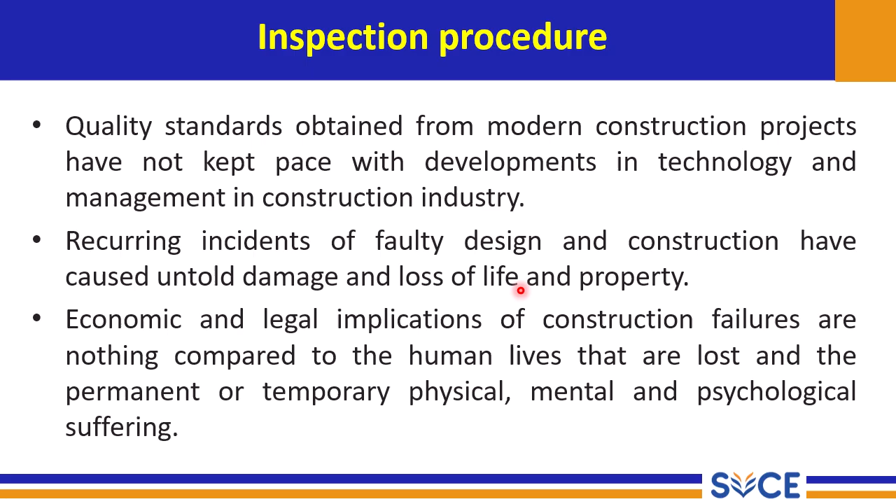Here, the quality standards obtained from modern construction projects have not kept pace with the developments in technology and management in the construction industry. Recurring incidents of faulty design and construction have caused untold damage and loss of property and life. The economic and legal implications of construction failures are nothing compared to the human lives that are lost and the permanent and temporary physical, mental, and psychological suffering.

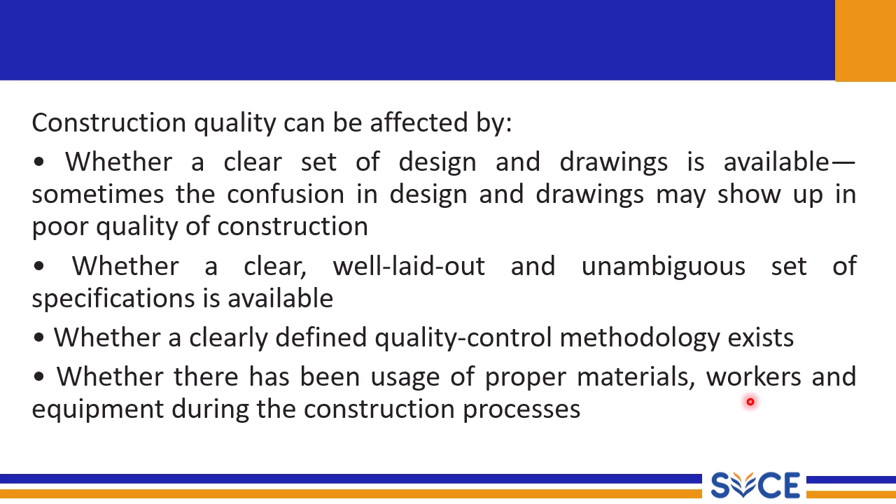So, construction quality can be affected by whether a clear set of design and drawings is available. Sometimes confusion in design and drawings may show up as poor quality of construction. Whether a clear, well laid out, unambiguous set of specifications is available, whether a clearly defined quality control methodology exists, and whether there has been usage of proper materials, workers, and equipment during the construction processes.

The major cause of controversy in quality control is delegation of responsibility and authority pertaining to quality assurance. Traditionally, designers, as agents of the owner, are responsible for ensuring compliance as per the specifications. So mainly the designer is the one who is responsible for whether they are meeting the requirements as per the specifications. So another controversy is the delegation of responsibility and authority. Who is going to control what? Who is responsible for what? That is one of the major challenges in quality control.

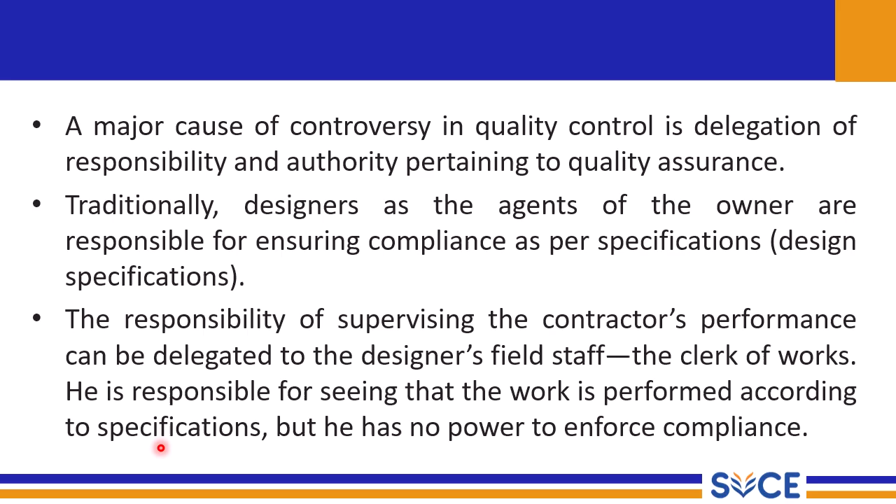So the responsibility of supervising the contractor's performance can be delegated to the designer's field staff, the clerk of works. He is responsible for seeing that the work is performed according to specifications, but he has no power to enforce compliance. Quality control is the responsibility of the entire project team, including the owner. Quality control inspections should be done with the motive of encouraging and ensuring good workmanship rather than to catch culprits. Specifications should be realistic and must consider natural variations in workmanship.

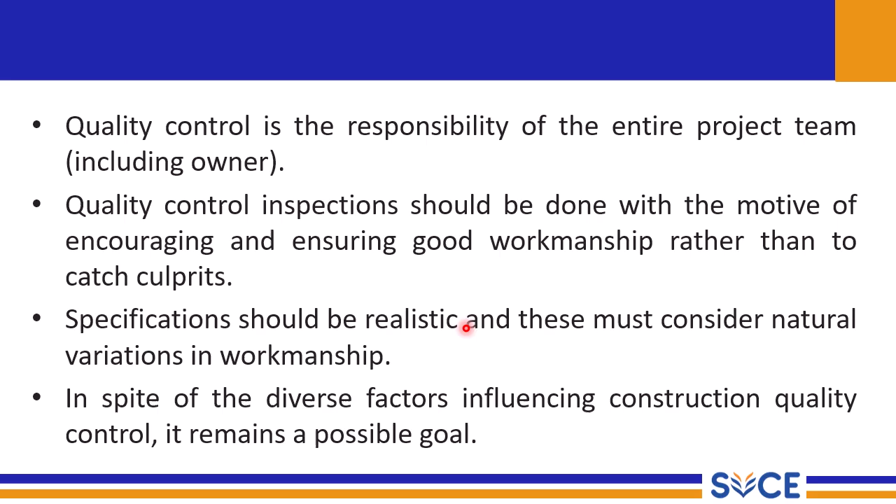In spite of these diverse factors influencing construction quality control, it remains a possible goal. The process entails a system approach that makes participants in the construction process work together as a team. By taking better care and offering incentives for good workmanship, quality construction can be obtained. So whenever possible, you have to offer some sort of incentives. You have to take care of the people involved in the projects by providing proper incentives, proper motivation, leadership. Those things will make sure that morale among them is properly maintained or enhanced, so that quality can be obtained through such activities.

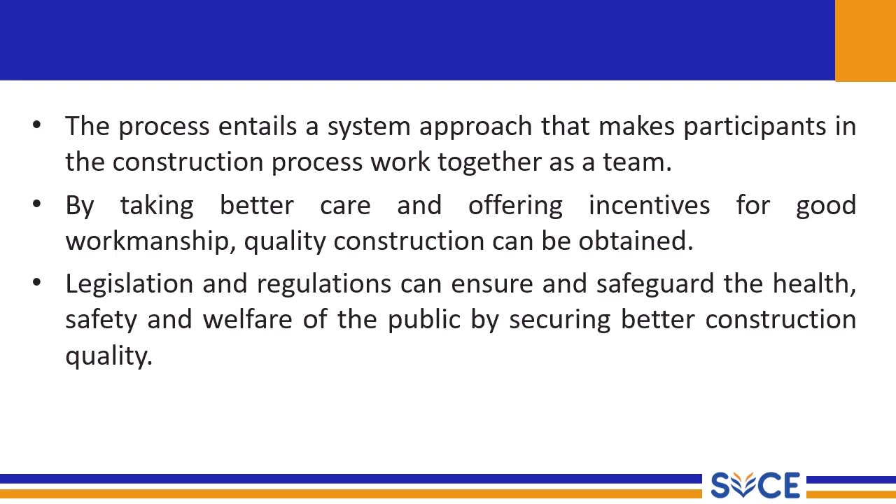So legislation and regulations can ensure and safeguard the health, safety, and welfare of the public by securing better construction quality. So we have to make sure that proper regulations, standards, and policy have been established and followed to make sure the health, safety, and welfare of the public is maintained.

So, inspection. Inspection usually entails checking the physical appearance of the items against what is required. Activities such as measuring, examining, testing, and gauging one or more characteristics of a product or service and comparing this with specified requirements are part of inspection. So whatever the material could be, you have to examine, measure, or test the material, and compare it with specified or standard requirements. That is called inspection: just checking it and matching whether it is meeting the specific requirements.

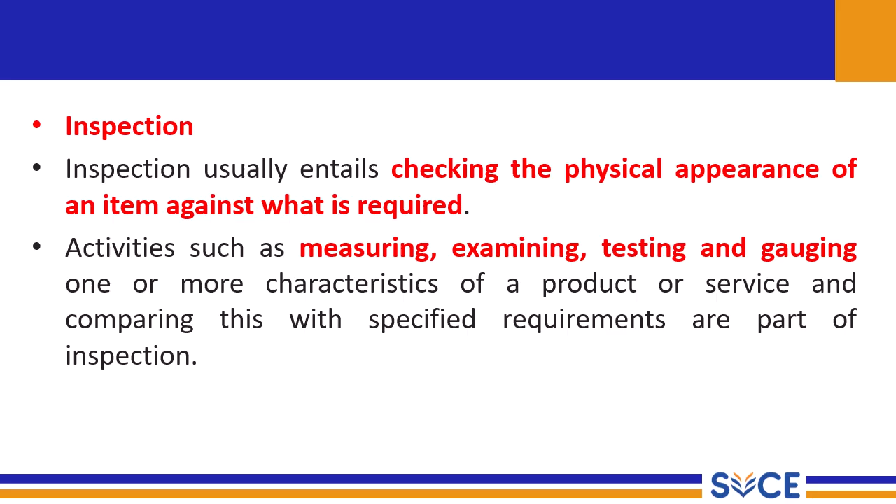So it is generally a non-destructive qualitative observation, not a destructive one, such as checking performance against descriptive specifications, and thus it could be subjective in nature. In some cases, gauges or machines may be required to do some simple measurements or examinations. Collecting concrete cube samples and testing them for quality interpretation is one of the common examples of inspection in concrete construction operations.

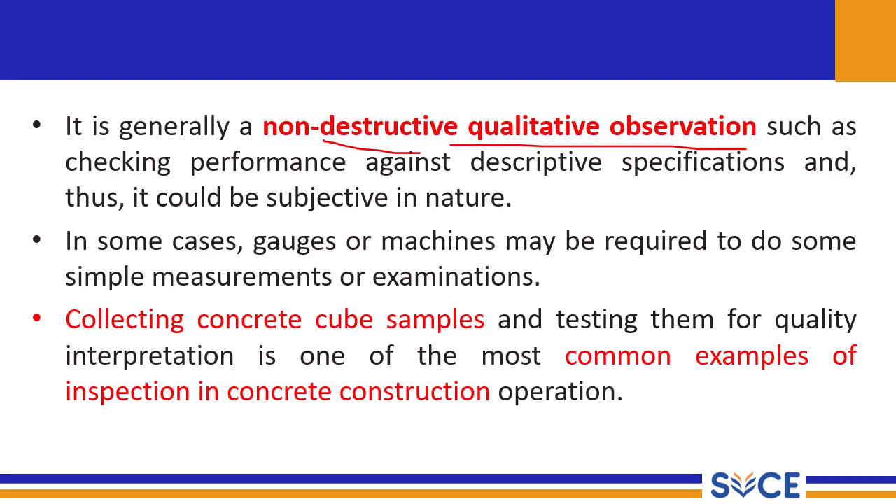Three common levels of inspections are at the time of receiving the raw materials, parts, assemblies, and other purchase items, at the time of processing, and final inspection prior to the acceptance of product. These are the different common levels of inspection: at the time of receiving, at the time of processing, and the final inspection prior to the acceptance of product.

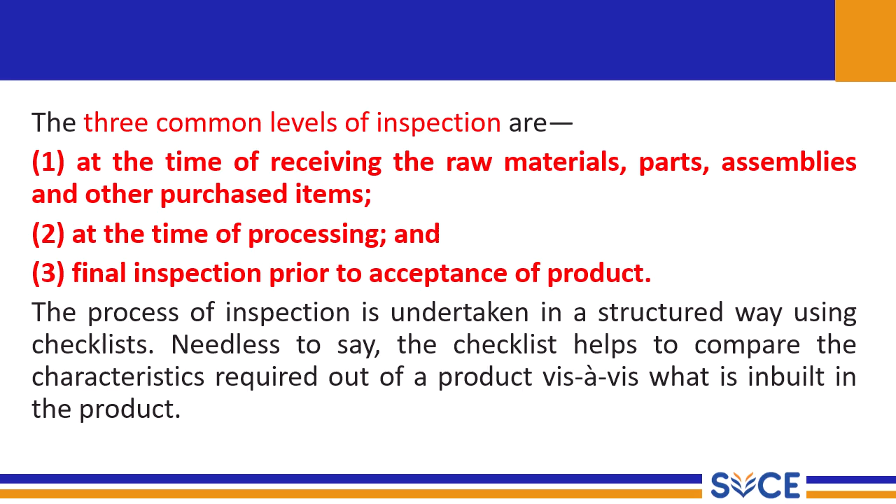The process of inspections is undertaken in a structured way using checklists. Needless to say, the checklist helps to compare the characteristics required out of the product versus what is inbuilt in the product. For comparison, you are going to create a checklist and compare the characteristics.

This is a sample checklist for formwork inspection. The description of formwork inspection items is given in the table, and you can see there is compliance and remarks. When you do inspection on the site, you will have a sample checklist like this. The quality engineer will go to each site and he will make sure for each question whether the compliance is yes or no.

For example, whether the approved design, drawing and specifications are available for the formwork system. If it is yes, the engineer will tick, and there won't be any remarks. If it is no, the engineer will say no and start giving some remarks, saying that the proper drawing has not been provided, proper specifications are not included, something like that. The corrective action will be taken care of by some other person, the person in charge, the quality manager, whoever is in control of the particular activity.

Likewise, we'll have different descriptions of particular work. For formwork inspection, different questionnaire sample checklists have been given. Are protection measures provided to all voids and exposed edges? Is suitable access and egress provided to the formwork areas? Is the formwork firmly supported to the base plate, ground, or supporting structure with good holding conditions? Has a working platform of adequate width been provided?